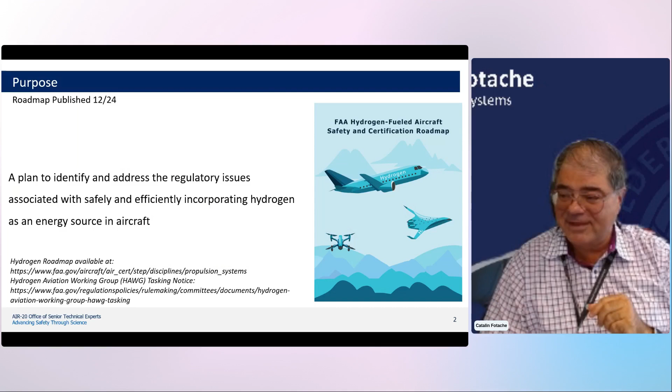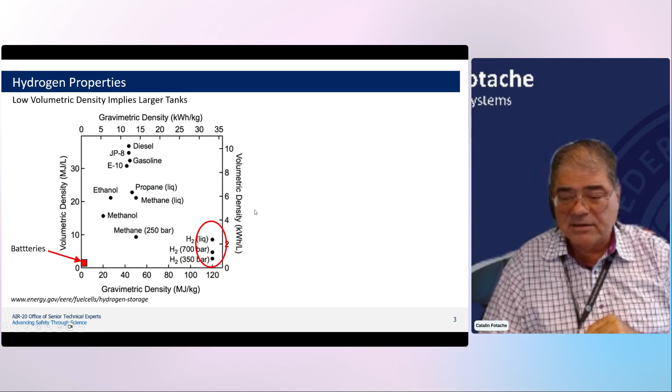The first thing that comes to mind as a concern for hydrogen use in aviation is the difference in its energy density between volumetric and mass basis. On a mass basis, it has higher density than hydrocarbons by about a factor of 3. On a volumetric basis, however, it's about a factor of 3 lower. The good news is that's still much higher than batteries, but the unavoidable implication is the size of tanks.

These pictures are from our friends at ATI, who do good work sizing and assessing different hydrogen fueling options. The green ones are liquid hydrogen, the gray ones are kerosene. You can see there are many embodiments putting hydrogen tanks in the back of the aircraft. No airline likes to sacrifice cargo or passenger space for a big hydrogen tank. So we'll most likely have to look at new designs, stretched fuselages, rather than retrofitting existing aircraft, especially for medium and long range transport.

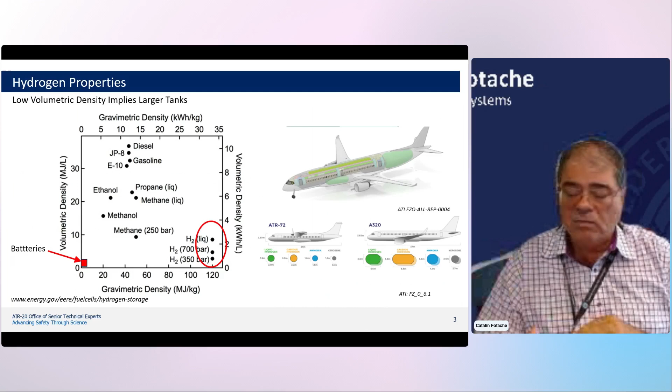Looking at this picture brings to mind certain concerns, especially with respect to crash worthiness. Currently we have what's called tail strikes. They're quite survivable and shouldn't happen, but they do happen from time to time on takeoff and landing. It will be more difficult if you have a big tank with thousands of kilograms of liquid hydrogen sloshing violently during a crash. So crash worthiness, as you'll see later, is something that concerns us.

But the most important risk we're looking at is fire and explosion. That's because hydrogen, although one of the simplest fuels in terms of chemistry and properties, is very peculiar. It has the widest flammability range, especially at the rich end. The central plot here is of most concern to us: the minimum ignition energies are about an order of magnitude lower than hydrocarbons, over a much wider range of concentrations. If some of you remember TWA 800, we never found the ignition source for that.

Eventually the FAA mandated control of flammability in fuel tanks, not just ignition sources. With hydrogen having an order of magnitude lower ignition energy, I'm pretty sure we'll have to assume that once you have a leak, it will ignite, resulting in either a flame or an explosion hazard.

Once you start combustion, hydrogen burns much faster than hydrocarbons. This is a comparison of laminar flame speeds between hydrogen and Jet A, and you can see the difference. These are laminar flame speeds; for turbulent flame speeds, the difference is maintained, and turbulent flame speeds can be several times larger than laminar.

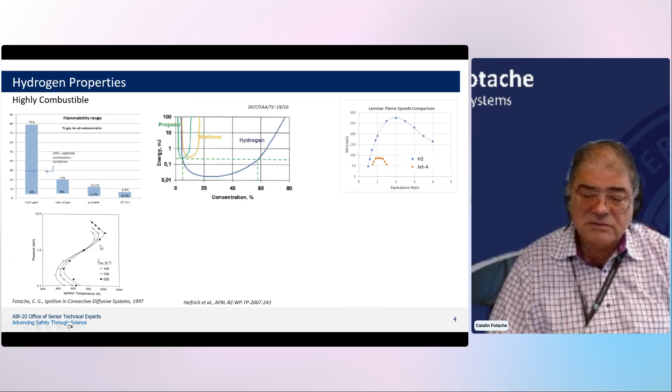It also has a funny three-limit behavior of ignition temperatures with pressure. Most fuels show increasing ignition temperature with increased pressure, so the higher the pressure, the harder it is to ignite. Hydrogen is unusual because of its chemistry: at both the low end and the high end, it actually gets easier to ignite as you increase the pressure.

Hydrogen also has some of the easiest detonability. Detonation is a particularly nasty phenomenon — it's a shock wave followed by a combustion wave, with order of magnitude larger increases in pressure rise and temperature. It happens most often in enclosed spaces, but it can also happen in open spaces as long as you have a strong enough initiation, like an explosion.

What you have here is deflagration-to-detonation time versus equivalence ratio, how much fuel is in the air. The bottom data are hydrogen, and again, it has the shortest time to detonation and the widest limits of detonability. The one good news is at the low flammability level — although there's still academic disagreement on exactly what those limits are and how they vary with pressure — they're in the neighborhood of 4% or so. Honestly, the heat release and radiative flux near the low flammability limit isn't a big concern, so calling it 4% is probably good enough.

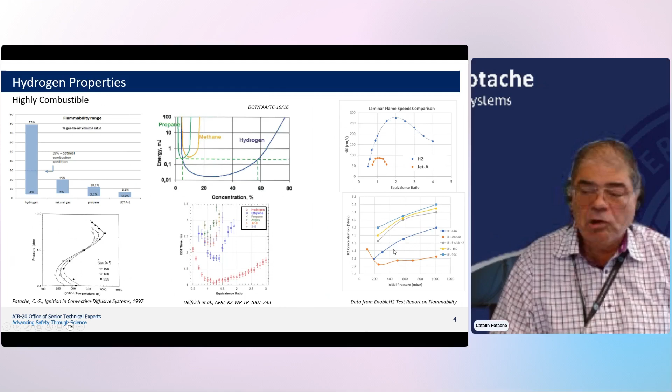Now, something we found relatively recently, and we're still looking at, really surprised me as a combustion person: the impact on combustion of other materials, particularly materials we find in the cabin. These are tests where we bring a Bunsen flame to a particular material — in this case a woven carbon — and we ignite it and then remove the Bunsen flame.

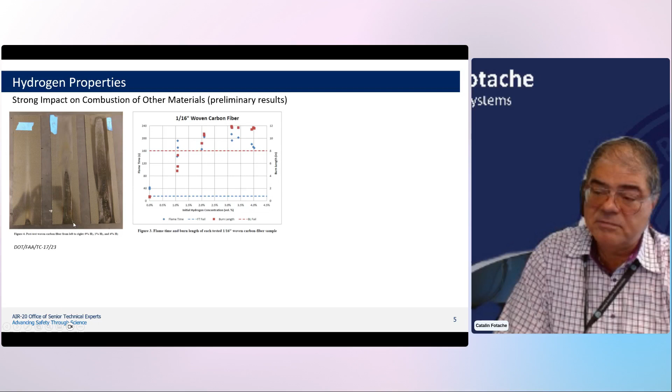Usually we expect that flame to die out within a certain time and length — these are our guidelines for time and length failure. The blue line is time, and the red line is length on the right side of the axis. What was very surprising to me is that even very low concentrations, way below flammability limits, way below anything I'd previously researched in terms of influence on combustion characteristics, mattered: 1 or 2% hydrogen created a significant qualitative and quantitative change in the combustibility of these materials. The flame length got a lot longer, and at 2% we failed both limits.

Similarly, if one measured heat release using calorimetry, we also found a significantly enhanced combustion rate and heat release rate for these materials. To be honest, we don't fully understand it. We can hypothesize that in a hydrogen environment you probably have a flame that sits closer to the surface of the material, but I'm not sure we understand it fully. This is an area where more research is needed.

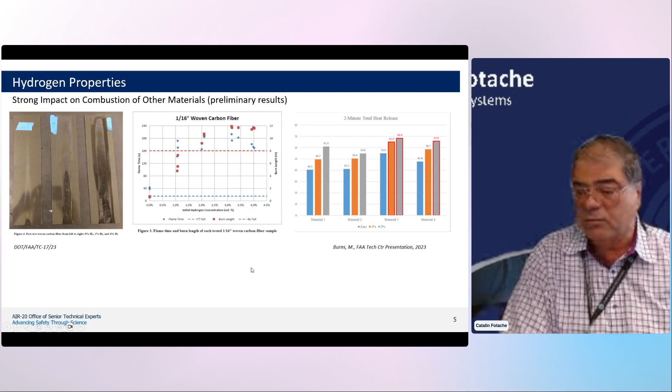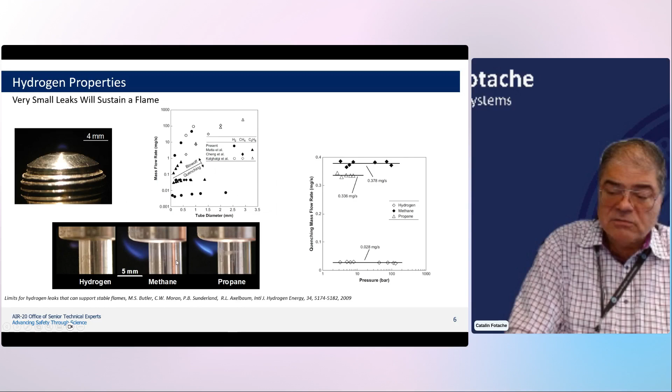Also, you can sustain a flame four orders of magnitude higher in flow rate — hydrocarbon limits are somewhere in between. They've also tested leaking fittings, which you can barely see here, because hydrogen flames in the absence of contaminants are barely visible since they emit in the UV. You can tell that hydrogen sits close to the surface, and again, it's self-sustained at very low flow rates.

So the question is, if such a leak occurred, is it a hazard? How do we detect it? How do we control it? What do we do about it? They've been worried about these things with vehicles — SAE J2579 limits such leaks to 5 micrograms per second, but not necessarily in operation or while the car is sitting in a garage. So I guess it's just when you put it all together.

We're running now some tests with hydrogen leaks in an enclosure, and it does appear that we are able to detect such leaks using something like catalytic hydrogen detectors. But I think more work needs to be done in terms of how we control these, perhaps with ventilation or shutting off the fuel, because in the end there is no substitute for shutting the fuel off for eliminating the risk of a hydrogen leak.

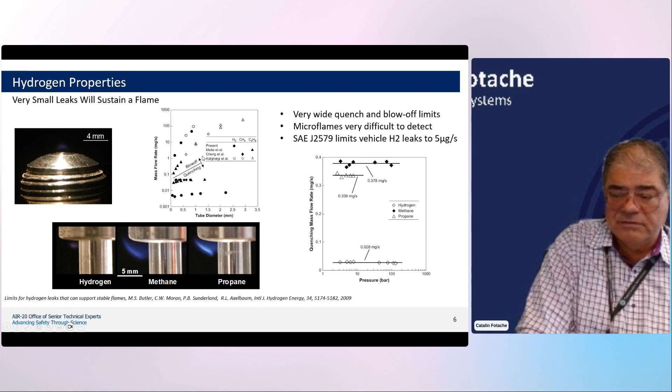I mentioned earlier there are a number of groups at the FAA and other regulatory agencies. We also have industry participation, and there's actually quite a bit of consensus among different groups and published data on key hazards for hydrogen in aviation. Even in this ranking, number one is fire and explosion, and I've mentioned leak detection — how would you know which fuel to shut off if you have to, and how do you know if you have enough time to land safely?

How would you do safe venting? Today, we can vent an entire kerosene tank, but a liquid hydrogen tank, unless you put cryogenic pumps, would be nearly impossible to vent. In terms of crashworthiness, are the current guidelines and safety factors still appropriate for liquid tanks?

A lot of the applicants that we're seeing coming with these technologies tend to make a lot of the stuff themselves, whether it's fuel cells, batteries, fuel tanks, distribution tanks, or filters. There's a lot of that. And for example, for tanks, everybody's trying to get a high gravimetric efficiency—the amount of fuel you carry divided by the weight of the entire fuel tank system.

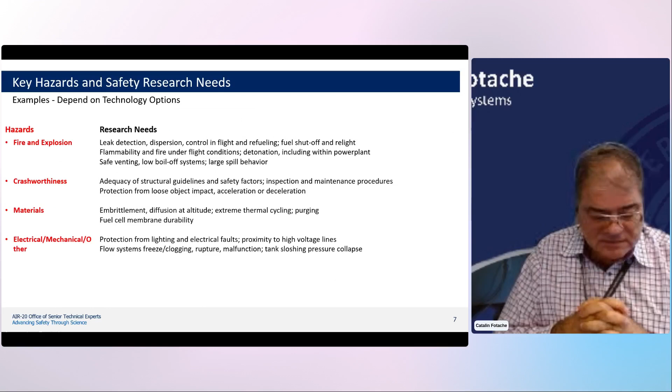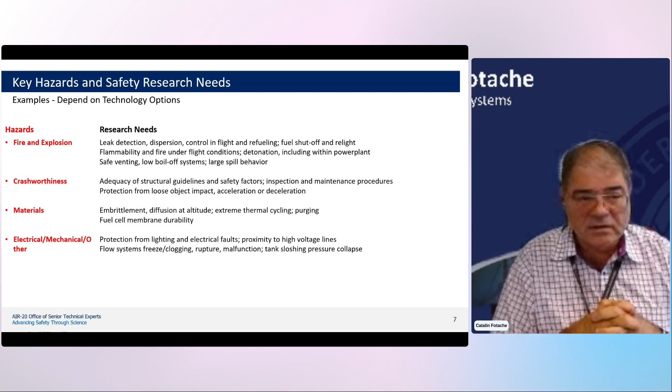As a result, they use thin-walled stainless steels, things that are less susceptible to embrittlement. But I'm not sure we know enough about the behavior of such double-jacketed, thin-walled vessels with large liquid hydrogen content in them upon an emergency landing, much less a crash landing scenario.

I promised to tell you something about certification. I do have to say that we do not have a consensus yet, even within the FAA or other regulatory agencies, as to what the best path for certification of these systems is. The reason for that is because there are gaps that we're finding in all the current regulations. However, that doesn't mean that we cannot and do not proceed with applications.

So the FAA will do special conditions, and the applicants will propose under which CFR they're thinking of seeking type certificate. There are some things that are fairly clear. The propeller, we know how to certify that. The electric motor and perhaps the inverter generally belong in Part 33, although there is some thinking that it could be Part 25 installation.

The consensus, though, is that these special conditions will have to draw from multiple areas of existing regulations and will need additional means of compliance.

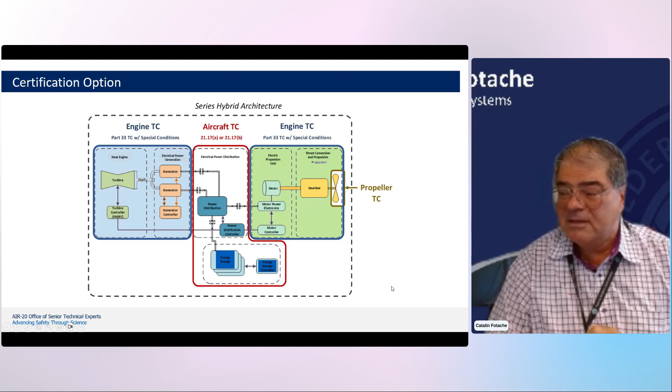Where we plan to use these tanks, often they have to be refueled. They don't go just once like NASA. We can't make them very heavy. So there is still a need to keep up the work and issue this guidance faster. We're more than happy to continue to help and support.

There are a lot of designs, startups, and companies trying different aspects. And then hydrogen powered gas turbines somewhat lacking or lagging, even though conceivably it's actually easier to burn hydrogen in a gas turbine engine than to make the entire fuel cell balance of plant, electric motors, controls, and so forth work, especially at altitude.

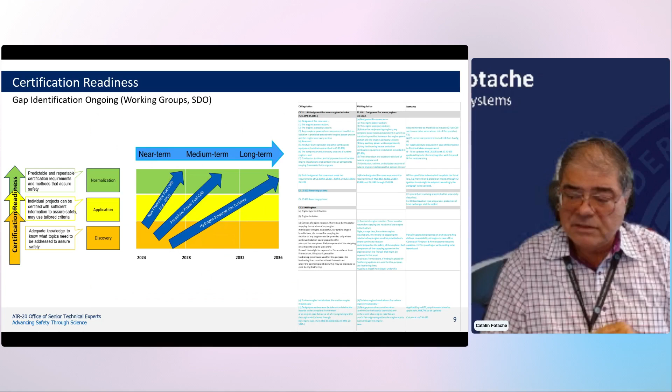As opposed to the longer range, where, as you know, Airbus has delayed their decision, and some of the bigger players have also scaled down their ambitions in the area. This is the rationale behind this—it's a reflection of both certification readiness and technology readiness. And it's hard to achieve certification readiness until and unless you have some stability in the technology options, which at the current time is still evolving.

This Excel excerpt is showing you the kind of detail that we're going through, going line by line through each of the CFR parts, and identifying, both on the EASA and the FAA side, where there are gaps, where there are alternative means of compliance, and needs for research.

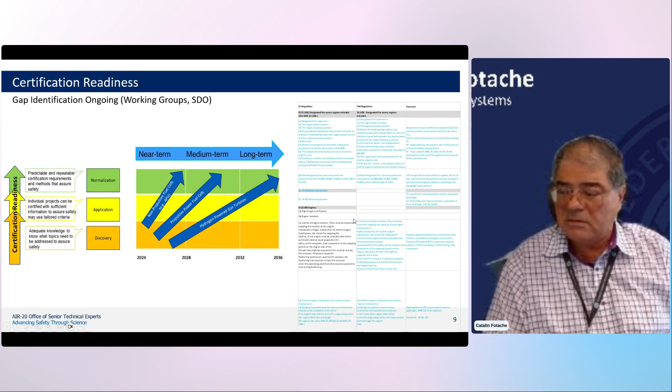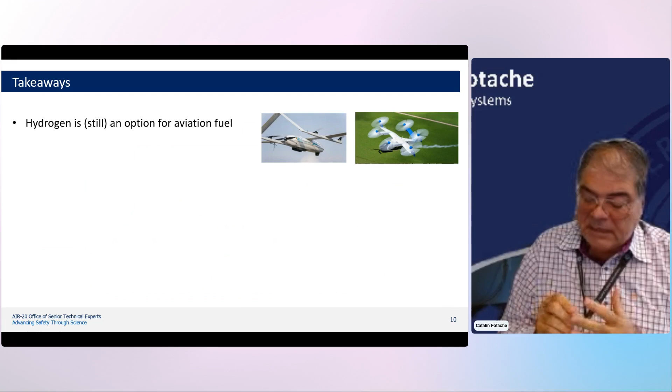I think, in line with the general optimism in this conference, hydrogen is an option for aviation fuel. I don't know if it's going to save the planet or be a major solution, but at least at the low end it delivers something perhaps other options cannot. It delivers scale and efficiency. Gas turbine engines don't scale very well at the low end, but fuel cells do, and hydrogen gives you range with respect to batteries. So I'm optimistic that we will see something ongoing at that end.

We must treat it with respect. I hope the things I've shown you have convinced you. We have hydrogen, we're using it—I used it as a grad student quite safely, and we know a lot about it. But with aviation we are going to be pushing the envelope, whether it's materials, distribution systems, the physics of what heat exchangers we'll use, what kind of refueling options, whether we can even allow passengers on board while refueling, not to mention issues of liquefaction at airports and transportation distribution within airports. It is not a trivial feat.

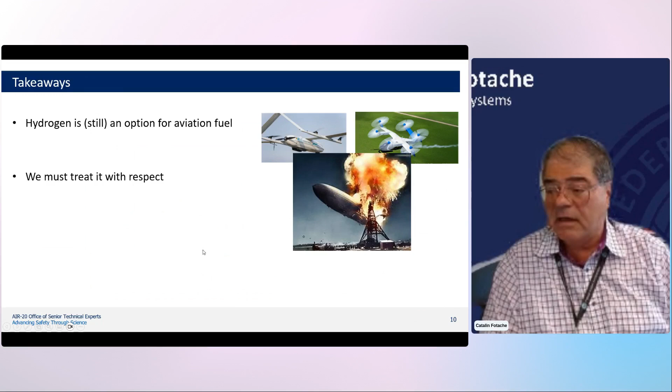I think for now it looks like an incremental, from-below type of diffusion is likely to happen in aviation, but I could be wrong. What I do know is that these steps you've seen so far are really just baby initial steps—putting a framework in place, getting the players together, increasing awareness, and so forth.

Much work remains, and that includes aerospace standards. So with that, I thank you again for your attention, and I'm happy to answer any questions.

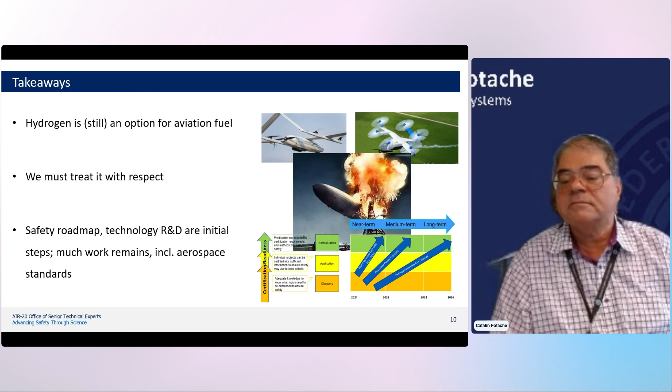Thanks. It looks like there is one question. Would you like me to read it for you? No, I'm reading it. It's a pretty... we could spend the rest of the day here. It's a big question.

So I think some of it I've tried to cover in the presentation. It's difficult to talk in general about the big impacts of using hydrogen in aviation, considering there are still many options possible. If we use fuel cells, for example, as the propulsive system choice, there are impacts with respect to thermal management, ensuring thermal management of these fuel cells because they still reject a lot of heat. There are impacts related to carrying reserve battery power and looking at batteries—that's an entire area to itself: whether they can go into thermal runaway, lose capacity at low temperatures, and so forth. How do we handle the purity of the air, and ensure, at least for low temperature PEM fuel cells, a fairly pure supply of both fuel and air, because otherwise you could poison the catalyst. How do we make relatively small filters, something not the size of the entire airplane?